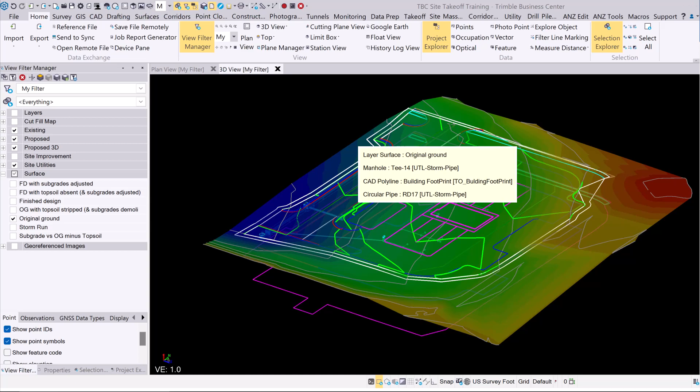All right, so there's a couple ways that you can get data into Trimble Connect to share with others. In this particular video, we are going to show you how to directly export out a file to Trimble Connect.

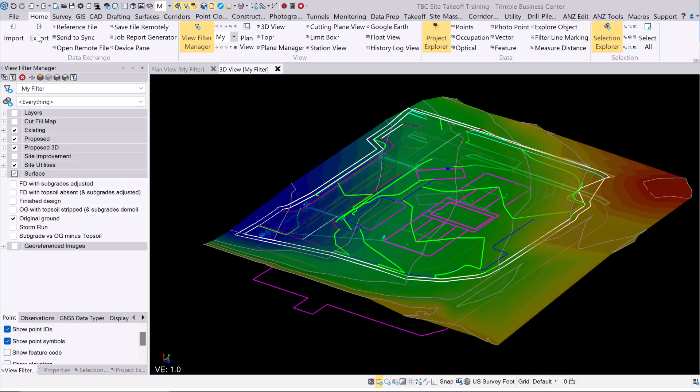So we're going to go to the Home tab, we're going to click Export. We're going to choose the file type. In this particular example, we're actually going to export out a couple of surfaces. We have an original ground surface and we have a finished design surface. So we want to send those out to give to somebody else, maybe to run in another application. And we're going to share that using creating a LandXML file.

So what I'm going to do here is I am going to just pick the OG surface as well as the finished ground surface, selecting both of those surfaces. So I have them both selected, they're two objects. And I'm going to come down here and give this file name, we're going to call it Surface OG and EX.xml.

Now we can come over here and click this ellipse button here, and we could navigate out to where we have our synchronizer folder. So if I was to come into that folder here, to the path, I'm navigating down to the Trimble Connect folder and into the projects. I could go to the project I want, go to surfaces, and I can drop them in here into this location. You can see I already have a finished ground surface there. That's some extra steps. Now, sure, I can probably make a shortcut over here and pin that folder so it's easy to get to instead of having to navigate that.

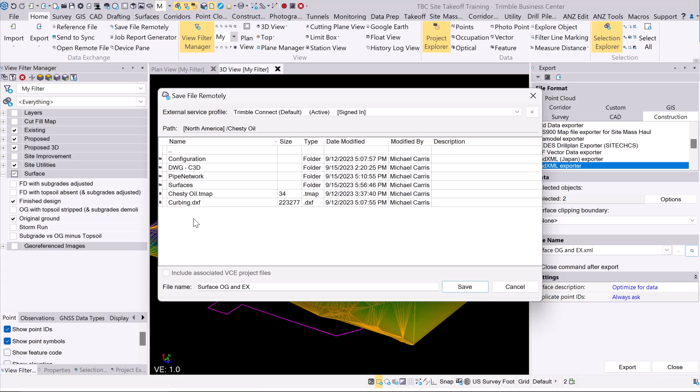Now, that would require you also to go to Trimble Sync, synchronize it so that it goes from your desktop to Connect. But within Business Center, there's actually a simpler method where we have this External Services button, and this will take us out to our Trimble Connect folder. So I've already been there, so if I back out of these with this ellipse button here, just up here, you can see that it should initially take you to the North American server location where your projects are, and then you can navigate down into where you want your project and then the folder you want your project in. Now, keep in mind, if you're doing it this way, that folder already has to exist in the Trimble Connect project.

So you want to make sure that you have that set up so that you can actually send it to that particular location. So I'm going to click Save, and then I'm going to click Export, and it's going to send out both of those surfaces as one XML file to Trimble Connect. So that was a direct export.

If I move Business Center out of the way here and we go into the folder, you will see in that project under surfaces, I've got that surface name. So when I click on it, it's actually going to go through, it's going to do the conversion, and it's going to show me those surfaces in the 3D viewer. So from here, you can mark them up.

Now, the idea with this is that you would go into another software application, or somebody else would go into it, download it, maybe use it in another application, or you're just going to use it here as part of your model.

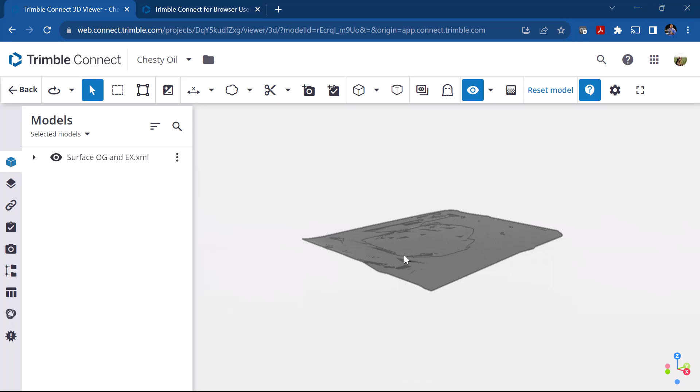So now you can see after it takes a few seconds there, now I have both surfaces. Now, if you want to look at them individually, you can see here, I can pick on this one or that one. So you can see both surfaces are there. And if I do a properties inquiry, it tells me a little bit of information about it. All right, so if I scroll down here, you can see a little bit of background, finished design, some data about that particular surface.

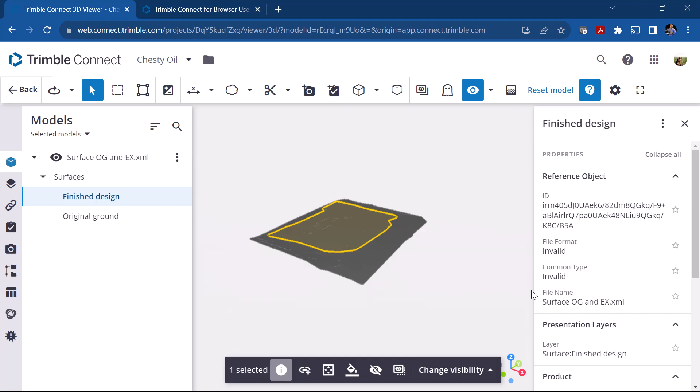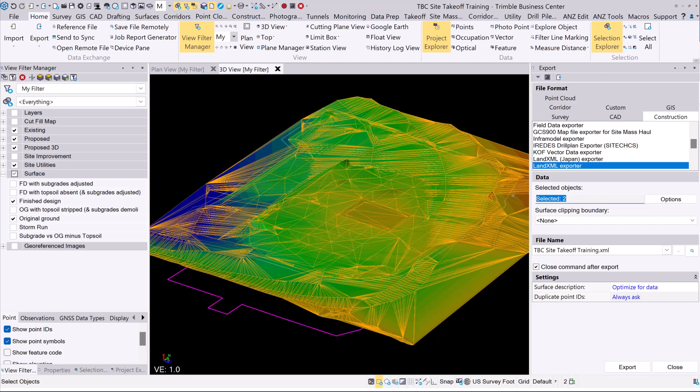Now, you could also do two exports out of Business Center. So if I did them separately, I would do it this way. I would go to Export. I would just pick the one surface. So I'm going to pick under Select Objects, just pick the one surface being the finished design, and I would name that finished design, and then I would send them out one at a time that way.

So kind of really depends on how you want to do it. But so you have two methods. One is to go directly to connect through the cloud button here, or go to your desktop, which is your sync folder, and use Trimble Connect Sync to send that file to the Trimble Connect project.